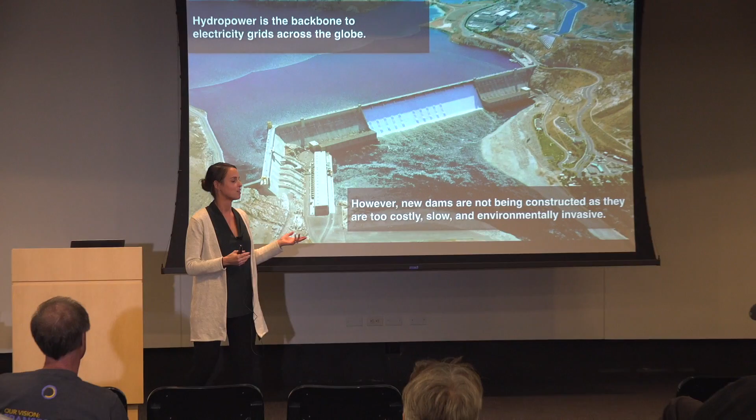Without further ado, I assume everyone here is familiar with conventional hydropower, like the image here. I know I met some folks already tonight that own and operate their own hydropower systems. Can I get a show of hands of anyone who's actually operating or dealing with, hands-on with hydropower? A couple of us?

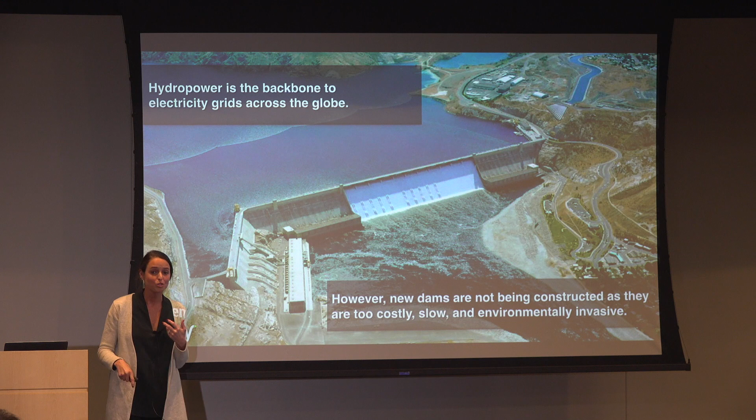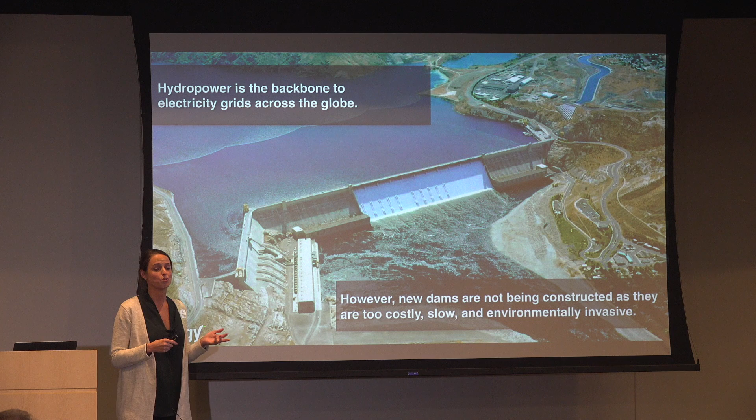Okay, well, we all should acknowledge hydropower being the oldest form of renewable energy, and many other really attractive attributes about hydropower. It's the most reliable, it's the most continuous, it's the most controllable form of renewable energy. It allows us to have a resilient power system, which is why it's the backbone of national electric grids all over the world. And hydroelectric like this is really the basis for what has spawned the industrial and other technological revolutions of our recent history.

So hydropower is great. We should be building more and more of it, right? Well, unfortunately, we're not building a lot of dams like the ones you see here anymore. As we probably know in this room, they can be very environmentally destructive.

In fact, there's many different campaigns for reducing the number of dams around the country. They can be very expensive to build a very large facility like this. It can take, on average, over 12 years from ideation to commissioning of a hydropower project, given the type of permitting that's required, especially around environmental sensitivities.

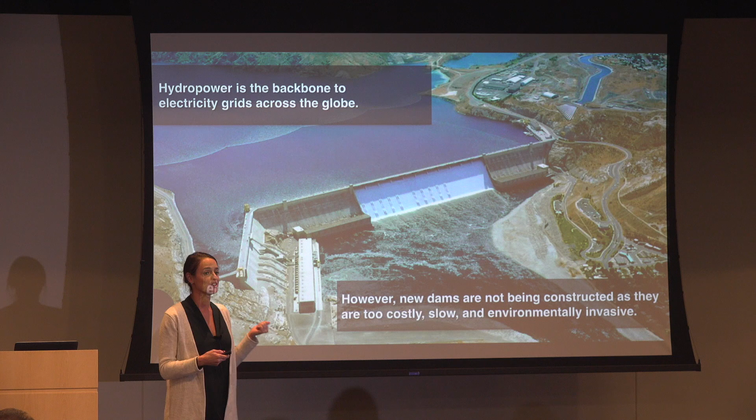And as more and more communities or states or even countries start making very aggressive sustainability goals, going to 100% renewable or going to a carbon-free future, the question is, where is this energy going to come from? It's unfortunately not going to come from hydropower, given that the average age of a hydropower dam in the US is now over 80 years old.

These systems are cost effective. They're rapidly manufactured. They're able to be installed very quickly. They're standardized. They're modular. They're replicable. There's many, many exciting things about solar. You have other things to add into it. I think there's a lot of good attributes about this. And most importantly, the cost is being driven down, so we're actually able to acquire these types of systems more cost effectively.

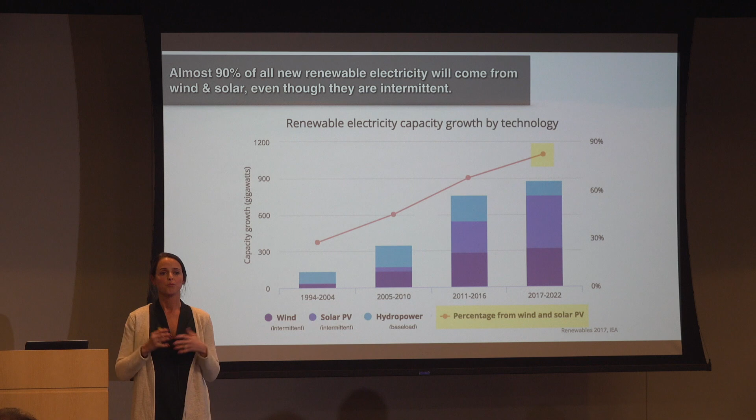So we see water movement as the world's natural battery. We have water infrastructure, particularly in our case, we focus on water infrastructure as opposed to natural rivers and streams for many of the reasons I mentioned earlier about permitting timelines, environmental sensitivities, and wildlife protection.

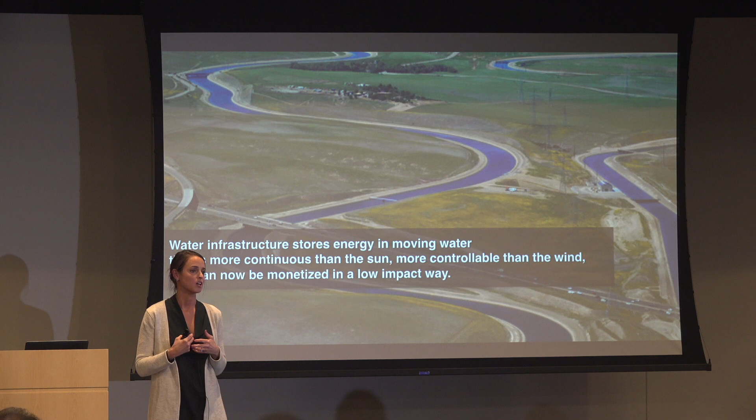We see water infrastructure as a source of natural energy storage that should be able to be tapped into for our use. These are areas that you cannot build a conventional dam. They don't have major elevation drops or even small elevation drops. These are the kinds of waterways that must continue to run in order for our crops to be irrigated, in order for people to have drinking water, and to serve many other commercial or industrial purposes around the country.

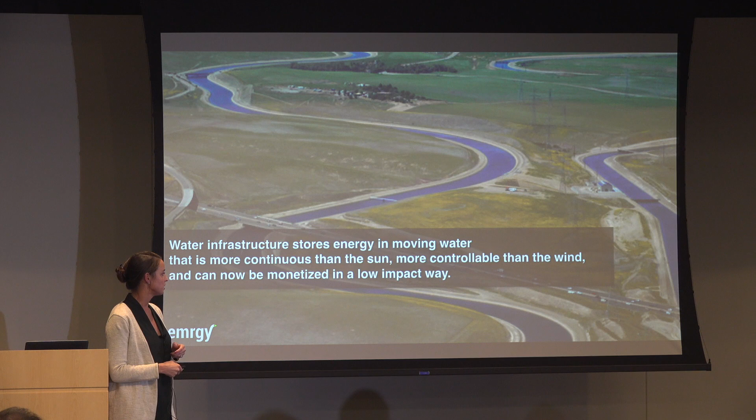So what we're doing here at Emrgy is taking a product style similar to solar and wind that is repeatable, modular, standardized, and able to be manufactured rapidly and at low cost, but applying it to a medium that is controllable, reliable, and able to be harnessed and applied for our good.

Essentially what we do is we've developed a low impact way to distribute hydropower along these channels, as opposed to centralizing it in one major facility, which is what hydropower has traditionally been about for hundreds of years.

What about the fish? This is a municipal water supply canal, so there are no fish or wildlife in this channel. That's another reason why we focus so closely on water infrastructure as opposed to rivers and streams. These are all brownfield developments, all retrofits. We don't put these in the stream behind your house or anything like that. That said, I will talk as we look at the technology about attributes we've included in the system for wildlife compatibility, although we don't target those areas whatsoever.

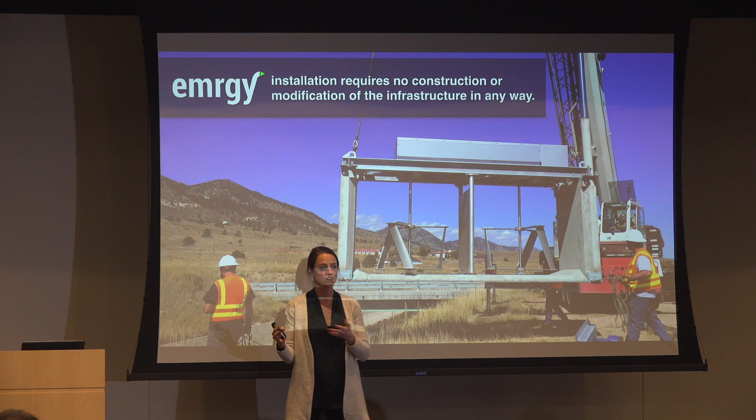These are kinetic turbines rather than pressure-based turbines. They really capitalize on simply the flow of water through the channel, not on head pressure or on an elevation drop. Essentially, these two work in tandem. They are hydrodynamically optimized to work together, and actually the efficiency of both of them next to each other is higher than just one or the other on their own.

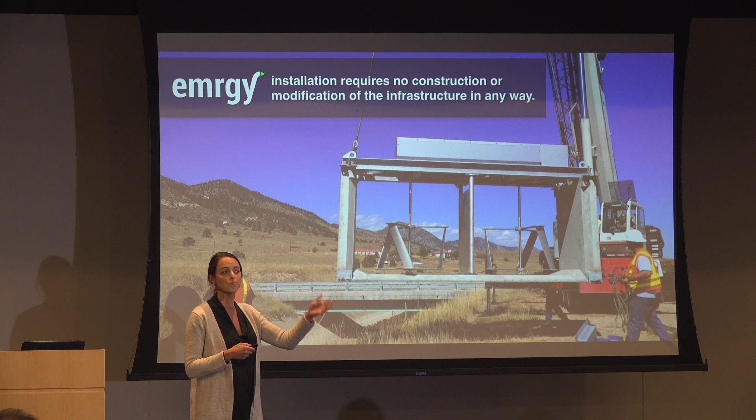So we essentially dropped this full system right into the canal using a very simple crane, like you see on the right there. We actually did rent this crane, but Denver Water actually owns a crane on site that can be used to move these in and out of the channel as they please. And then we just sit them right down onto the floor of the channel.

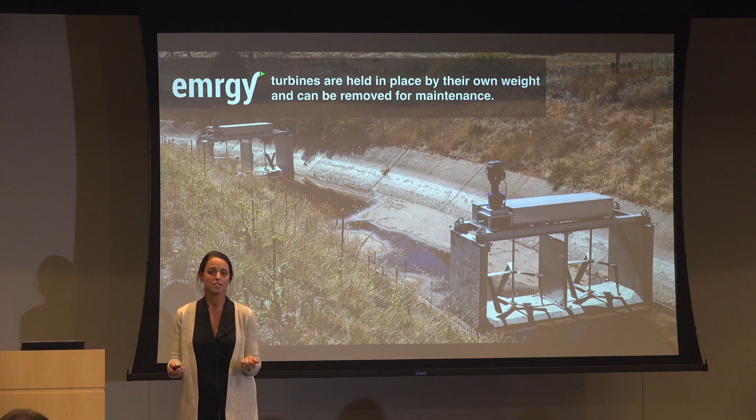We don't modify the structure in any way. We don't do any anchoring. We don't do any diversions or any additional changes to the channel whatsoever. So once they're installed, they simply sit there. They're held down by their own gravity and are unable to move with worst case water flows.

And then as the water gets turned on and flows through these units, we scale up the power capacity by putting arrays in series inside of canals. It's intended to be an extremely low impact solution where you can place them right down in the channel and connect the units together, aggregate the power, deliver that back to the grid or to a net metering or behind the meter arrangement with the water asset owner.

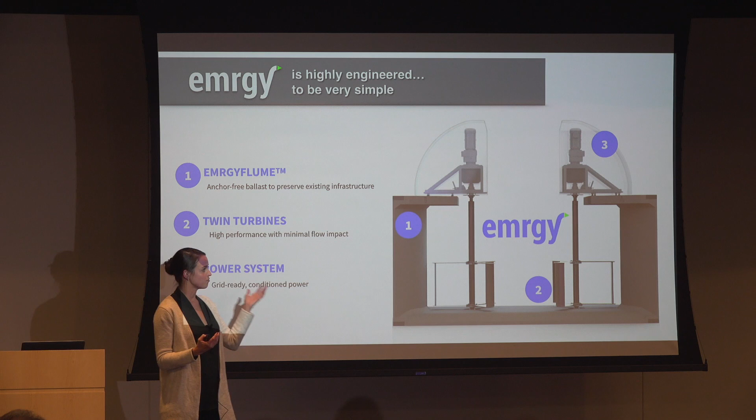So I'll walk you briefly through some of the technological features that make our distributed hydro option unique. Our product consists of three major subsystems. We have our flume, the precast concrete structure I mentioned before. We have the hydrokinetic assembly, and then we have our power system.

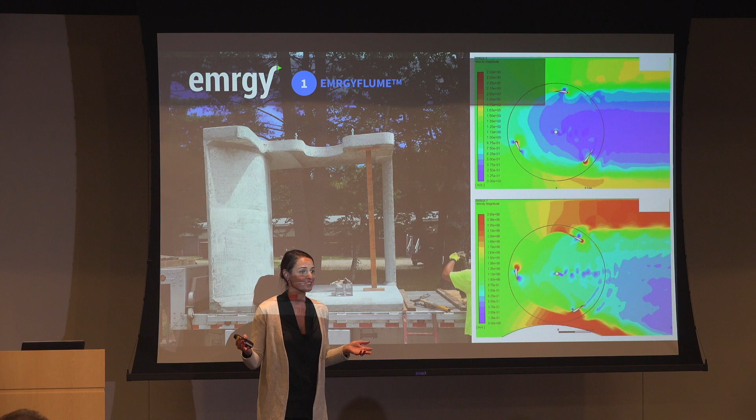So when we look at the flume, it's intended to be very simple. This is our gravity base. Beyond that, though, we do some engineering, and a lot of engineering is embedded into these systems to keep them very simple. As I mentioned, this is a hydrokinetic system, meaning it operates based on the flow of the water. So you can imagine it much more similarly to a wind turbine than perhaps to a hydro turbine. In wind, the faster the speed, the more power you get, which is exactly the same principle here.

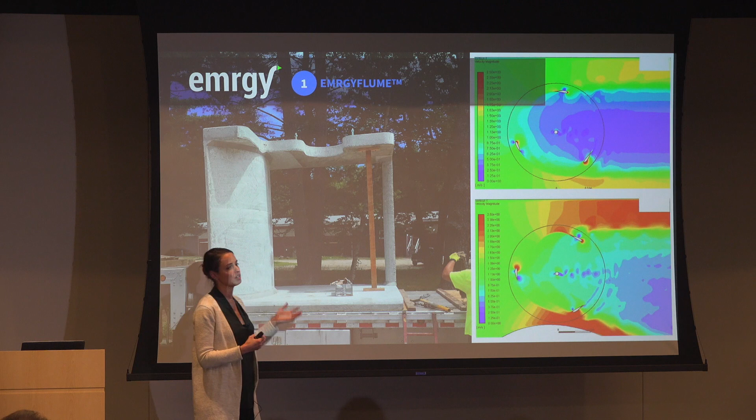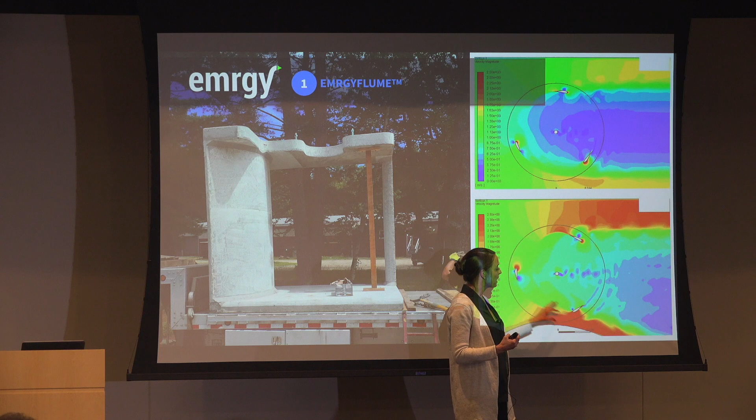And so what you'll see is we've actually created and engineered a radius, a hydrodynamic radius inside the concrete wall that acts as a flow accelerator. You can see here in the top image a velocity gradient without any acceleration using the concrete. Here, what you see is once we radius in this concrete, a really high acceleration of velocity right where the turbine comes and harvests the torque that's going to be converted into electric power. Simple designs like this have allowed us to really increase the power density of these seemingly very simple units.

And so this flume is actually a very important part of our product, not just from the standpoint of maintaining our customers' wishes, that they maintain the integrity of their canal in full. They still have everything ready and able to operate the water flow as needed for municipal or agricultural purposes, but yet we're also able to use it from a performance standpoint, adding to the power density of our units.

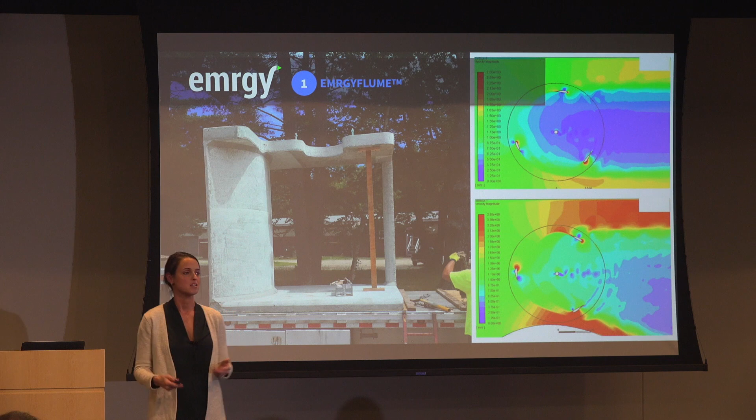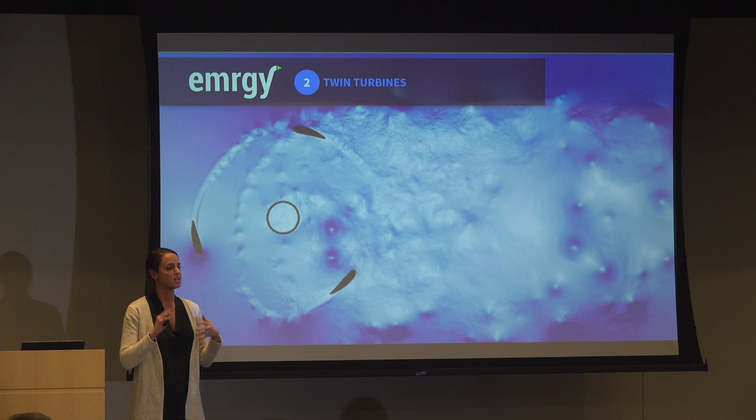When we look at the turbines, we have spent hundreds of lab tests and simulations looking at how we can utilize a vertical axis system rather than perhaps what you may have seen in other concepts of horizontal axis looking like a true wind turbine, to be as high efficiency as possible. We believe that vertical axis is the most applicable type of system for distributed hydro in that it's able to maximize the water column while also taking advantage of the mechanism of how the water flows through the channel.

And so we have a whole team of hydrodynamicists who have assessed many different turbine types, and we spend a fair amount of time not just looking at how the turbines interact, but also how the series will interact. When you drive by the NREL site close by or other wind farms and you see the orientation of different turbines, to be able to take advantage of the fluid as it moves through a series of different operating machinery, our system works in a very similar way. So we configure our arrays in a very specific way so that as water flows through, we're able to capitalize on the wake of each unit, either in front or behind, and optimize the power performance.

Interestingly, we've been able to demonstrate here in Denver different operations in flow regimes where, this year in Colorado, there was a series of wet months where we were getting so much water flow into the Ralston Reservoir that they actually didn't need to run the canal upstream, which is where our turbines are. So we fell into quite a low flow regime for a series of weeks and months.

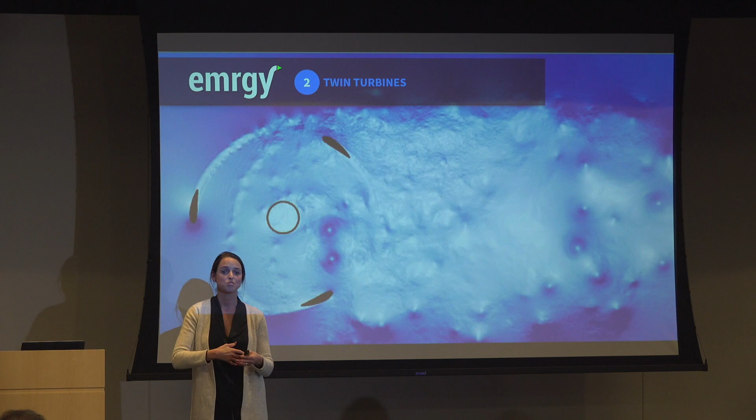One of the interesting optimizations that came out of this was we were able to take some of the downstream units and overspeed them, almost operating them like a motor and bringing water levels up in front of them, adding a bit of blockage there, bringing water levels up just a couple of inches to push those units upstream into their optimal operating range.

And so there are array dynamics that we are on the forefront of discovering, for how you can utilize these systems in connection with the clients. Because one of the unique parts of this type of industry is that, while there are weather impacts...

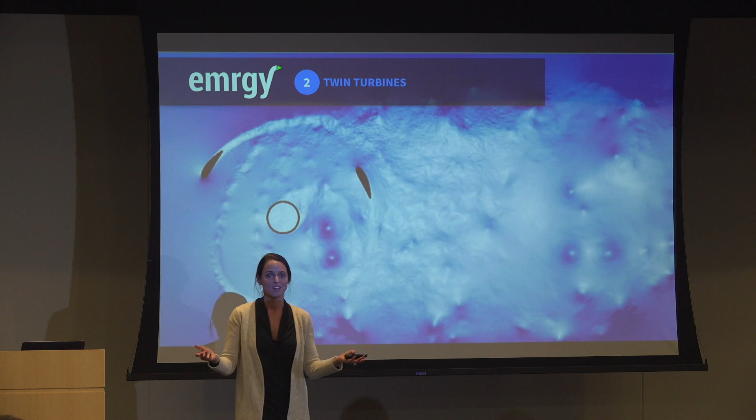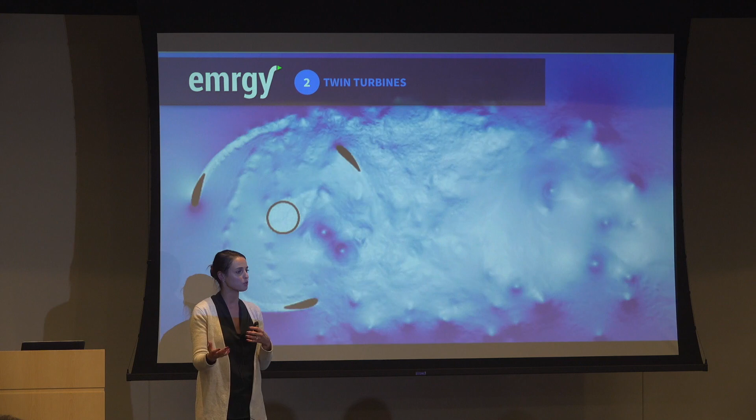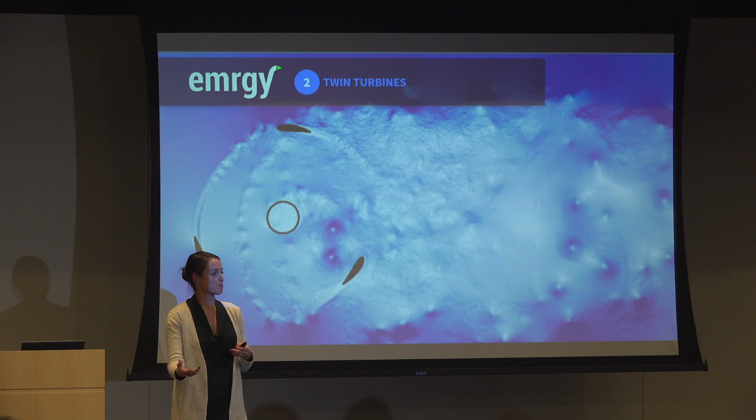...just as I mentioned, having excess rain in downstream reservoirs or things like that, there is a whole aspect of operational efficiency and operational excellence that can be achieved to be able to run the canals for power generation. And to be able to coordinate the operation of these systems with the water asset owners' operations in general, so that when they fall into that low flow regime the next time around, we can already proactively anticipate that, begin to operate in that mode, and be able to maximize the amount of power that they're able to get out of that in light of the operational regime that they have.

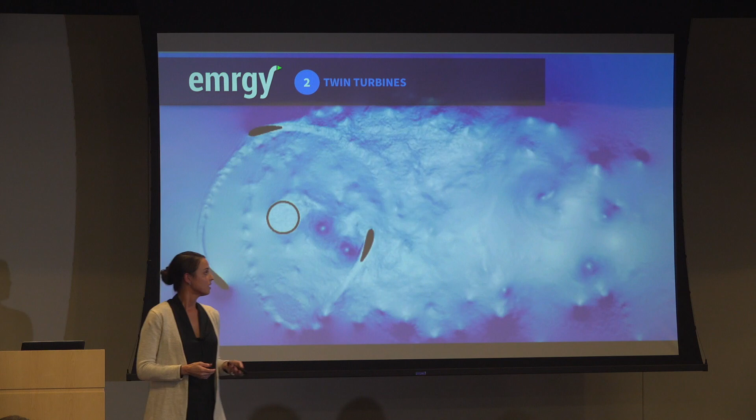The electrical side of the business is not an area that we innovate. We focus our innovation on how we take energy that's inherent in water flows, how we convert that into meaningful, usable energy for our customers.

So this is an area where we really want to focus on developing distributed hydro in the most sustainable way possible, without introducing any new risk to the grid or to our customers who need a very reliable power system.

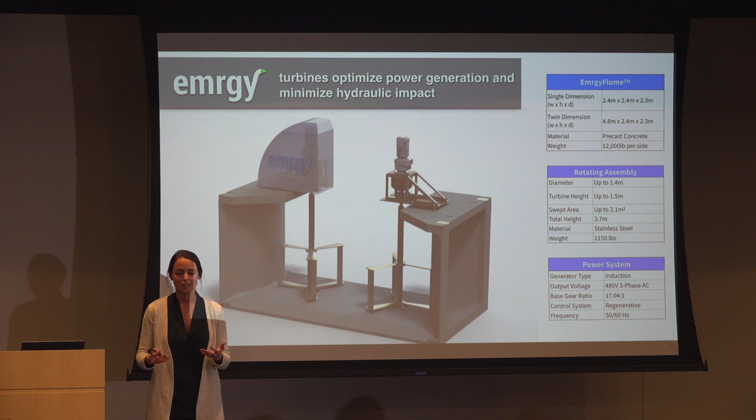It looks like something that you can imagine and that you've seen working in operation. And when you see it turning in the water, it's very familiar, as opposed to something that is a black box in a canal that you don't know exactly what's happening there. Our goal is to keep it as transparent and as simple as possible.

What we've done to try to understand this opportunity is start with DOE estimates on where hydrokinetics could be applied, both globally, in terms of both onshore and offshore opportunities. Then we said that doesn't really make sense because we're not an ocean technology, we're not trying to put this out there. We had to narrow that down. So then we looked at rivers and streams, but we're really not looking at rivers and streams either. We want to find the infrastructure of where we can install this.

So instead, what I ended up doing - I think I lost the award for Best Boss of the Year - is I had an army of interns map every single mile of water infrastructure in GIS, pulling in information from the U.S. Geological Survey that's released every 5 years, and transcribing or translating both GIS and USGS data with Google Earth resources to map out all the characteristics about these sites. You can see California here, we have Washington, and essentially we're working our way west to east, mapping every water infrastructure location that's ripe for distributed hydropower.

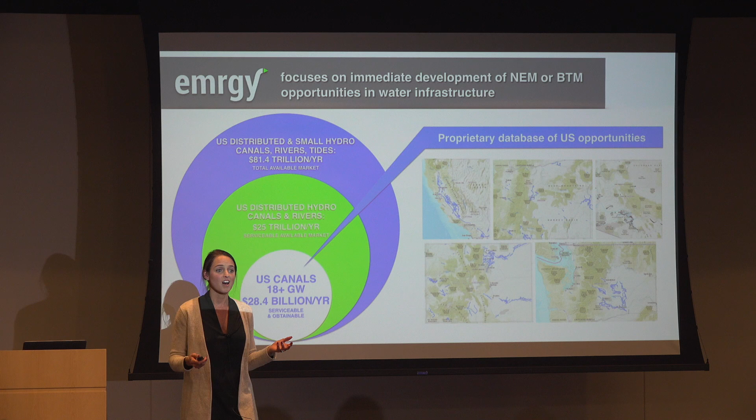That may seem like a lot, 15,000 miles, but when you look at other countries around us that also have significant agricultural infrastructure - I was just talking with folks from Taiwan last week where there's 68,000 kilometers of concrete-lined agricultural infrastructure. Our neighbors to the south in Mexico have something around 40 to 50,000 kilometers of water infrastructure. So while distributed hydro isn't necessarily the huge figures coming out of DOE reports for what oceans or tides may offer in hydrokinetics, infrastructure is a fabulous place to start building an industry, building a mass of distributed power resource that can really move the needle toward a more distributed, sustainable grid and sustainable future. We hope to be on the forefront of that, and hope to see a lot of additional development around that here in the US and globally as well.

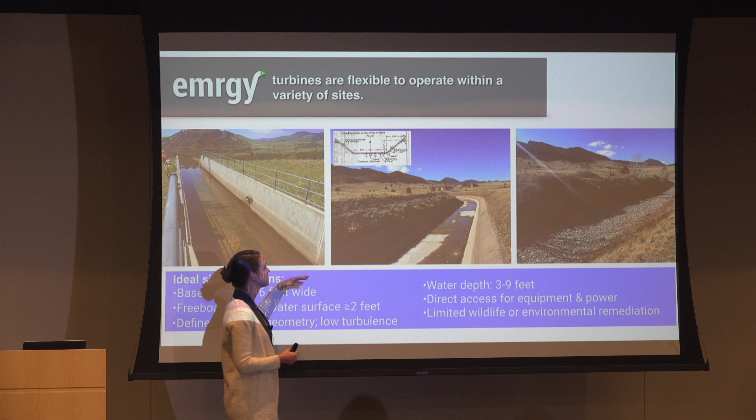So looking at this database, I'll tell you a little bit about how we practically site locations for distributed hydropower. The modules, as I mentioned, don't use any anchoring or other type of construction. So fitting them into channels that are sort of box-shaped, almost like a chute, versus your traditional trapezoidal irrigation channel or even earthen-lined channels, can be applicable.

We really look for sites that aren't tiny ditches though. As I mentioned, our twin system is about the size of a Hummer. So when you see these types of channels, ask could a car or an SUV fit down in there? That's really the meaningful size you need. You could certainly do smaller systems, and I'm sure some of you have seen the YouTube or viral videos about camping-style floating buoys that can charge a cell phone.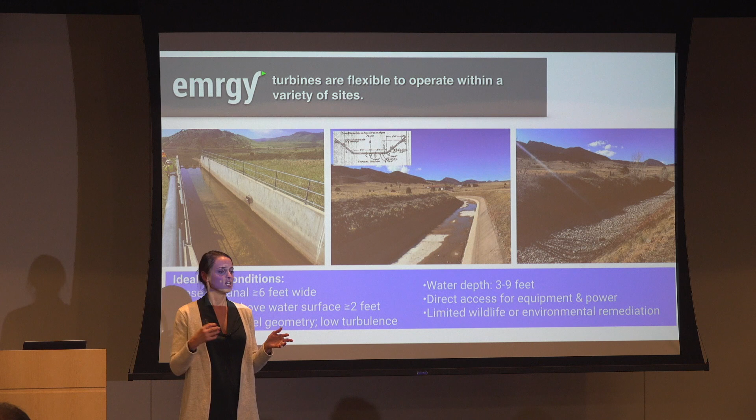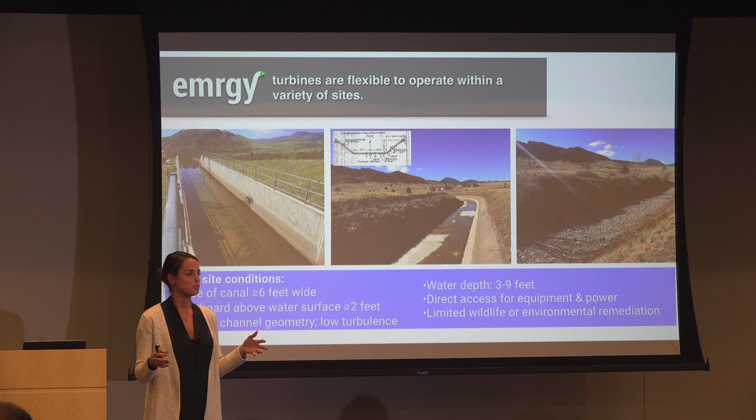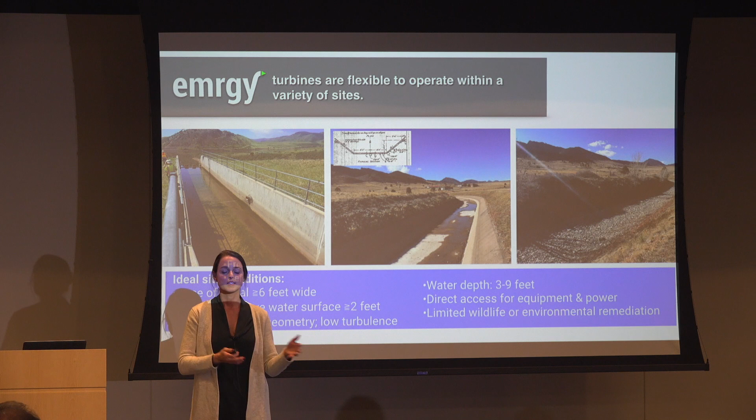You don't need a large channel for that, but what we're trying to do is not necessarily assist in off-grid living, but develop a more sizable alternative to distributed solar and wind. We're looking at megawatt, multi-megawatt installations. To do that, you need a sizable unit that can capture at least 7 to 10 kilowatts per module, then multiply that by 100 units to get to that megawatt scale. So we seek sites that have the appropriate dimension to fit a car, 3 to 9 feet of water depth, places where heavy equipment can come in to deliver and install these systems, and access to the power grid.

Once there are sites like this, we run a series of hydrodynamic and hydrostatic simulations to look at the power potential in these types of sites. We look at the slope of the channel, the discharge, and put together a flow profile overlaid with an energy profile that distributed hydropower could achieve. We use an Army Corps software called HEC-RAS, used often in hydrology. Where's my hydrologist around here? There she is. Then we work directly with water asset owners to microsite each of these units for an optimal array.

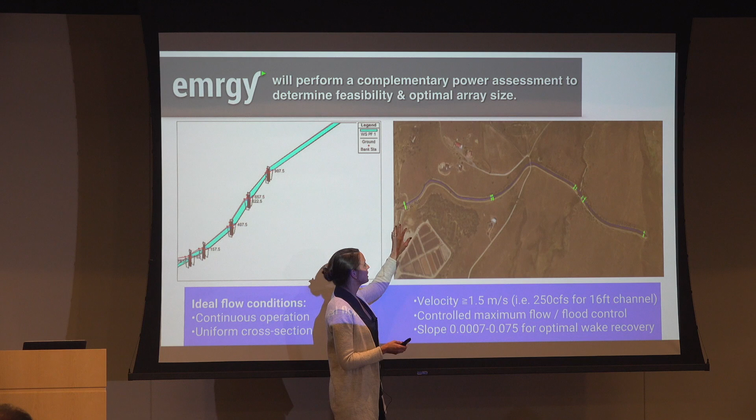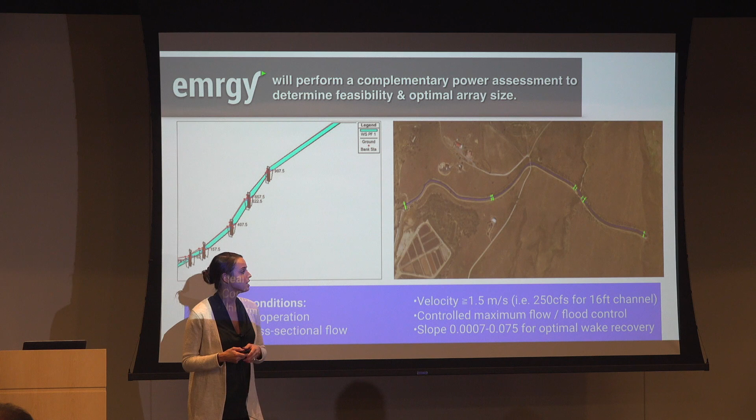You may be wondering, why are these closer together and why are these further apart? That's really where Emrgy excels in our intellectual property. I know I've talked a lot about how this is simple and anyone can do it, but understanding how the slope of this channel changes over the operation of the fluid, and where water accelerates or slows down based on geometric or elevation changes, to optimize the power output of a system while minimizing the hydraulic impact on water levels, is a very complex equation done through sophisticated modeling.

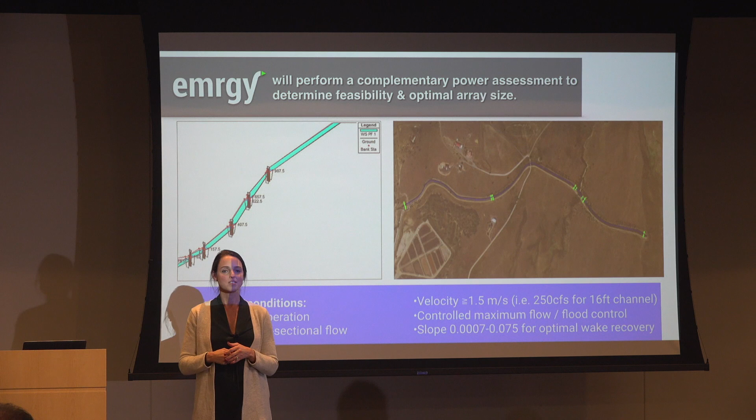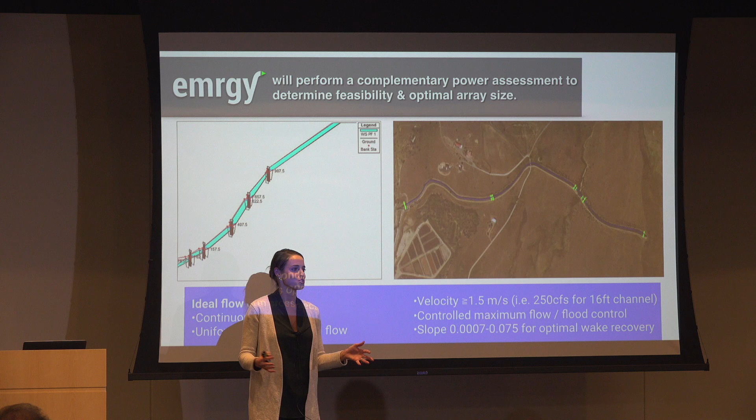We hope that one day we can refine this process to something that is rinse and repeat. I was talking with someone recently who told me the first time they installed solar panels on their roof, 20 years ago, they had 4 different site measurements, 4 inspections, all kinds of simulations looking at the angle relative to the sun. Now they just replaced their system and had one intake form on a website, and it was optimized and done. We hope there is optimization in this process, especially as the distributed hydropower industry develops, so siting becomes more convenient, straightforward, and quick.

But today we do a good bit of hydrodynamic analysis on every single site. So when we talk about job postings, we're always looking for folks who can help optimize this process as well.

From there, once we site out the array, I'm sure you're wondering how much does a system like this cost? We continue to make the automotive analogy where these are about the size of a large SUV, and they cost about the same, between $40,000 and $50,000 a piece on the equipment side. Our new partnership with GE, we hope, will reduce those costs much quicker than we could on our own, because they've got a bit more buying power than a tiny company out of Atlanta asking manufacturers to make our equipment faster and cheaper.

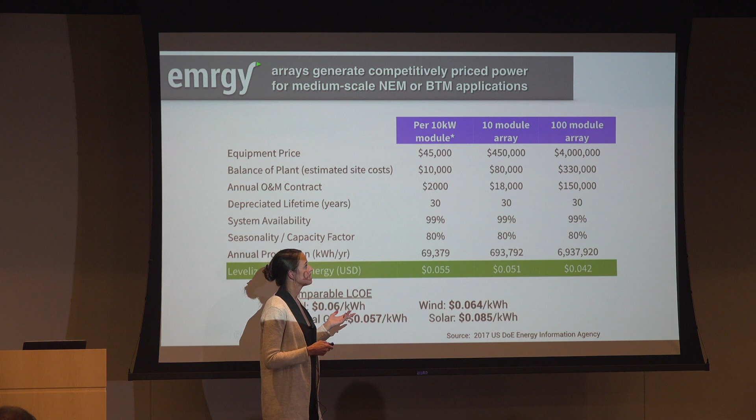As we continue to drive this down, what's important to note about this slide is not the actual numbers, because the truth is every site is different, and we do a customized proposal for every site. So it's important not to get hung up on the specific numbers. What this slide is intended to illustrate is that even though the cost of the equipment is going to be a bit higher than, say, your average solar panel or solar equivalent...

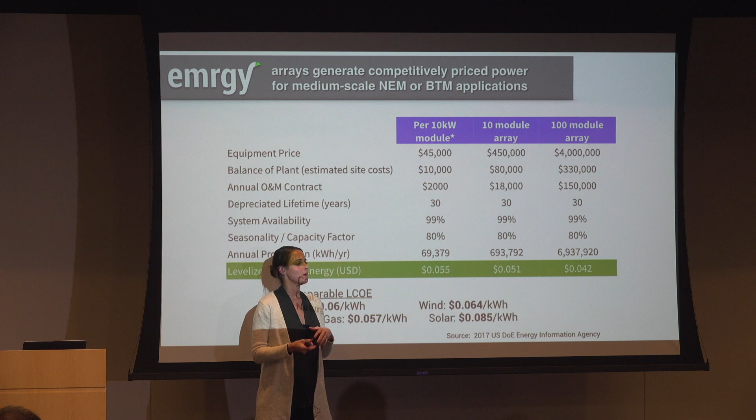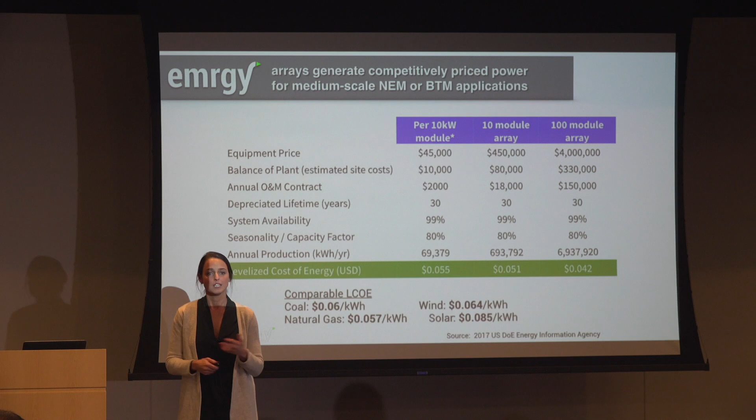...what you see is that we are really targeting areas where we can install these, and they're going to operate 80% of the time or more. If that can be achieved, the cost of energy per kilowatt hour can be really competitive for a distributed system. I'm not talking multi-gigawatt utility installations here, I'm talking behind-the-meter or net-metered medium scale installations. This can be an extremely economically competitive solution in areas where water flows often near continuously or continuously. When you compare that with similarly sized medium scale alternatives, it becomes very competitive, even though it is a new and emerging industry.

So we work with customers really in two ways. Water asset owners can invest in the array themselves.

Often these types of water flows are owned by either governments or quasi-governmental agricultural entities, who are making money today through selling that water, either selling it to people like us for drinking water, or selling it to farmland. So remonetizing that infrastructure to be able to sell power is a new revenue stream, a new opportunity.

So we offer the opportunity to invest into the system and take the profitability from that over the long term. We use the same equipment as hydropower in terms of shafts, bearings, and gearboxes, so the life cycle, while we advertise it to be 30 years, should be, if properly maintained, a very long time for them to realize the benefit of hydro as they run their system. Or we also offer the opportunity for them to simply host an array.

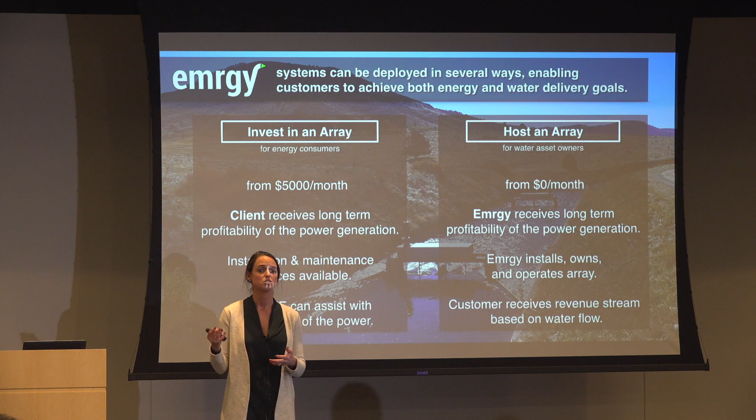That would be similar to other types of renewable project development, where they would offer the water flow and be paid essentially a lease payment for being able to use that water flow. We would develop the project ourselves and develop the utility relationship or the commercial or industrial relationship for entities along the canal to be able to net meter or use this behind the meter.

At the scales we're looking at today, from the 100 kilowatt to 2 megawatt range, this makes the most sense for us to be looking at net metering and behind the meter opportunities.

So that's a brief overview of who we are and our view on distributed hydroelectric power as we see it today. Obviously, I'm one person in this emerging industry, so I'm sure there are many other ways to develop or invest into the development of distributed hydro, and I'm happy to open a conversation or dialogue across the room with any questions you might have, or any other topics we may want to cover for distributed hydro, because I think we have a good bit of time to do that.

Can you tell us more about the generators themselves? Do they have built-in inverters? Yeah, so today what we're doing, as I mentioned, we are keeping things super simple.

So every system is a 480 volt, 3-phase AC induction motor. We use those both as generators and as motors. Motoring is actually the best way to clear debris, interesting fact. So essentially we take this wild AC that's coming from the variable frequency of operation. We use an ABB drive that acts as what we call our turbine controller. Every turbine has its own controller that is essentially an ABB drive that does both rectification and inversion in the same box. That conditions the power there. It also allows us to maintain the optimal rotation speed relative to water speed and control the performance.